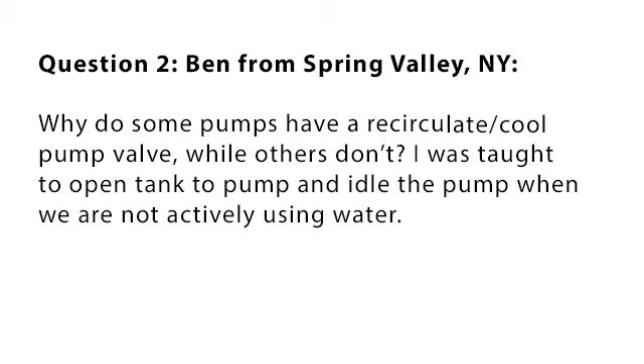All right, question 2. Ben from Spring Valley, New York. He says, why do some pumps have a recirculate/cool pump valve while others don't? He said, I was taught to open the tank to pump valve and idle the pump when we are not actively using water. I guess I'll take this one. Greg?

During the pump operation training, which we do, anytime we engage the pump, we want to be moving water. The reason for that is water that's deadheaded that comes from our tank and doesn't go back to tank or out to any discharges will heat up over time, and that will cause the water to get hot enough that it could cause damage to anybody that gets that water on their skin. So we worry about, number one, protecting the firefighter. So we never want to deadhead water. We want to keep that water moving.

The second reason, if it got hot enough, it's hard on mechanical seals and other parts that are in the pump also. So you always want to open up, recirculate water, but most of the manufacturers have gone away from what we used to have as a pump cooler line or a recirculation line that was typically 3/8 or a 1/2 inch, and they've incorporated that now into the tank fill valve.

So you want to crack the tank fill valve, and that's the important part, is just cracking it. A lot of times that's a 2-inch valve, and a 2-inch opening flowing at 60 psi is going to want to flow about 1,250 gallons per minute. So if you're operating from tank, at that point you would be trying to cavitate your pump and returning too much water to the tank.

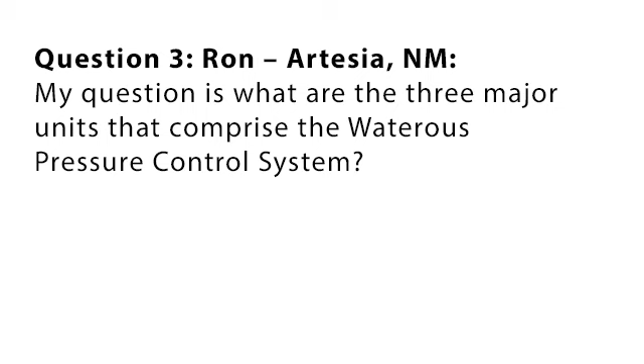All right. We'll go on to question number 3. Ron from Artesia, New Mexico asks, my question is, what are the 3 major units that comprise the Waterous pressure control system? I can take that one. All right, Jay? Basically, there are 2 systems. You have a discharge relief valve system, and you have an intake relief valve system.

The discharge relief valve system will control discharge pressure, so you don't have an overpressurization of a discharge line. If you're running 3 hand lines, you shut 2 of them down without a relief valve system in place, one line could be overpressurized, and it's firefighter safety.

You have 2 parts to that system. You have a relief valve, which is down on the pump itself, between the discharge of the pump and the intake of the pump. And then you have a pilot valve, or control, on your pump panel. The pump panel controller, the pilot valve, will sense pressure changes and control the discharge relief valve to bypass water from the discharge side of the pump back into the intake.

The intake relief valve system, again, has 2 components. Typically, you have a dump valve down on the intake, and you have a pilot valve on the panel or in a compartment on the opposite side of the truck, basically doing the same thing, controlling the intake pressure so that if you have a spike on the intake side of the pump, the water will dump to atmosphere to maintain a constant pressure on the intake side of the pump.

Main reason you have intake relief valves is you need a pressure differential between intake pressure and discharge pressure for the discharge relief valve system to function. There's got to be a differential so the discharge pressure can bypass back into the intake side of the pump. The intake relief valve also protects against water hammers. If there's a water hammer created on the intake side of the pump, it'll dump that water to atmosphere.

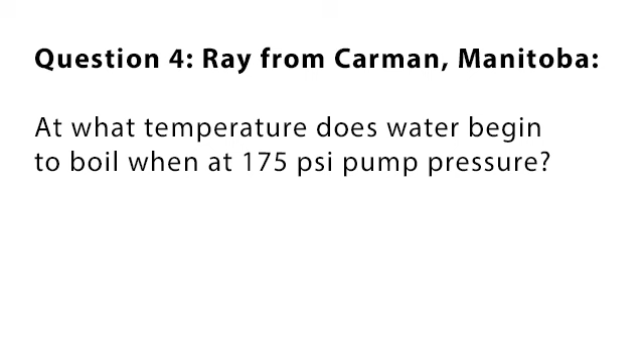Okay, our question number 4 comes from Ray from Carman, Manitoba. At what temperature does water begin to boil when at 175 psi pump pressure? Well, what we concern ourselves with is water boils actually at a lower temperature when it's under vacuum. So we run into cavitation problems, of course, in the eye of the impeller, due to the fact we tend to try to run away from the water, if we're trying to pump more water away from the pump than we can supply to the pump.

So that leads to cavitation, which in a vacuum is actually going to boil or turn to vapor at a lower temperature than our regular boiling point at regular atmospheric pressure, which is 212 degrees. Under pressure, that temperature raises quite substantially. It actually takes about 375 degrees Fahrenheit to boil water at 175 psi.

Now we end up having recirculation cavitation issues sometimes, which is on the discharge side of the pump, and that's also under pressure. But what it's doing there is creating a negative pressure right at the exit of the impeller and the stripping edge. So again, it boils the water and causes cavitation. Great, thanks, Greg.

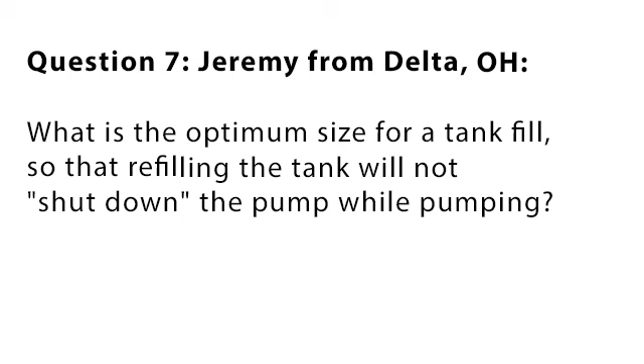Jeremy from Delta, Ohio. What is the optimum size for a tank fill so that refilling the tank will not shut down the pump while pumping? I guess since I answered the previous one about pump cooling, this one kind of ties in with that. As I mentioned before, most of the time the tank fill is a 2-inch line. Again, even when you're filling the tank from draft, you want to be careful that you don't open that too far.

And I think what he's talking about, shutting down the pump, built into the governors, it will realize when you get into a cavitation situation. So it might go down to idle and then it flashes low water at that point. So no different than your discharges. If you're flowing more water than you can get to it, you're going to get a cavitation situation. So it's really tough to answer because not knowing what your source is.

If you're from a hydrant, you shouldn't see that, and you got to be careful because a lot of the tanks, the plastic tanks with the baffles, they have a maximum fill pressure also. So not only do you have to worry about putting too much water in there at one time, which will cause cavitation and shut down the pump, we also have to worry about the pressure that's being exerted into the tank when you're filling it. So you have to worry about where your source is coming from and how far you open that valve.

All right, thank you, Greg. We're off to question number 8.

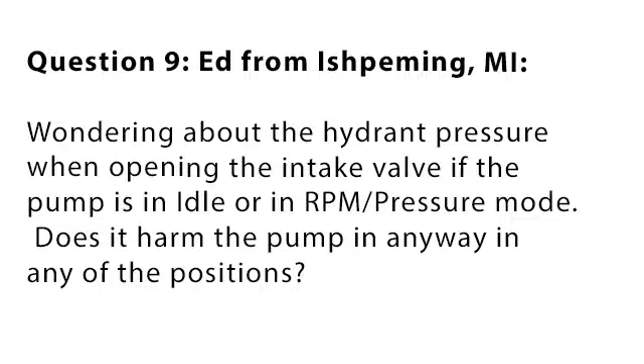Wondering about the hydrant pressure when opening the intake valve, if the pump is in idle or in RPM or pressure mode. Does it harm the pump in any way in any of the positions? Well, I think they're talking about a governor there, whether you're in RPM mode or in pressure mode. Yes, okay, that makes sense. I was trying to think of how our pump or system would matter there. But yeah, you typically are changing over at idle. And as far as the RPM and pressure mode, Greg probably would be better.

Yeah, if you're in RPM mode, as you open up the hydrant, let's say you're switching from tank to pump over to hydrant, it's gonna maintain that same RPM speed, and what's gonna happen is you're gonna get a higher pressure. You have to take the pressure that you're operating at from tank and add your incoming pressure, which would be the hydrant pressure. If you have it in pressure mode, that's where your safety is gonna come in, because it's gonna recognize that the pressure is increasing, and it's going to reduce the RPM or the engine speed to maintain that pressure that you have it set at in the pressure mode.

So as far as harming the pump, I don't, in either one of those, I think we're worried more about the pressure that's going out to the hand lines. So if you're in RPM mode, you need to take that into consideration if you're bringing in hydrant pressure, because again, it's going to add that hydrant pressure to your current discharge pressure. So typically you want to be in that pressure mode so that it has the reaction, slows the engine down at that point. The pump really isn't going to see, unless you're on a really hot hydrant, any issues with pressure.

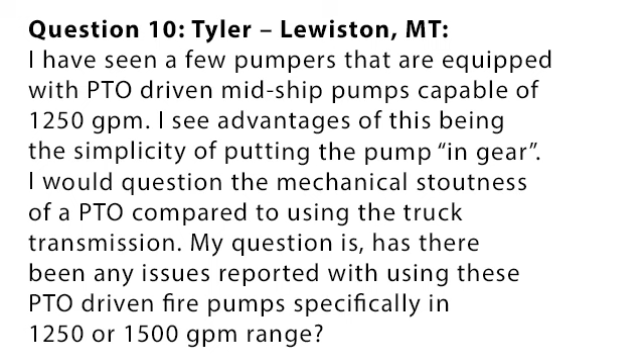The next question we have here is from Tyler, Lewiston, Montana, and this is a long one, so hopefully I can read the full thing. I've seen a few pumpers that are equipped with PTO-driven midship pumps capable of 1250 GPM. I see advantages of this being the simplicity of putting the pump in gear. I would question the mechanical stoutness of a PTO compared to using the truck transmission. My question is, has there been any issues reported with using these PTO-driven fire pumps specifically in the 1250 or 1500 GPM range?

This being more of an application question, I'll kind of take that as I had some time in the applications department. It's kind of a two-part question there. It does help that we don't have a shifting collar, so it does help in a shifting situation. A lot of our shift issues were taken care of with the help of the Allison MY09 standards, which if the OEM wired that in, it actually recognizes a butt tooth condition where you don't have a completed pump shift, and will actually jog the drive line to help it engage. It does help with putting the pump in gear as you are just engaging a PTO, which is a hydraulic actuation of the power takeoff.

Early on, the power takeoffs that were available both from Muncie and from Chelsea, we had problems with overloading or over-torquing those. As Steve had mentioned before, we've got plenty of horsepower in the engines that we have nowadays, and if you supply a pump with horsepower and the water, we can pump it a lot higher than the actual rating. So we run into issues sometimes where we can over-torque the power takeoff, but some of the OEMs have been able to tie in a speed limiter or a cutout or a limiting device, and they actually wire it in so that we don't overspeed the PTO.

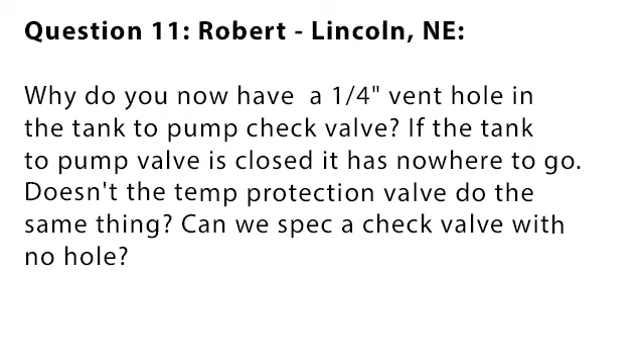Perfect. Thanks, Greg. All right, so we're going to move on to question 11. Robert from Lincoln, Nebraska. He asks, why do you now have a 1/4-inch vent hole in the tank to pump check valve? If the tank to pump valve is closed, it has nowhere to go. Doesn't the temp protection valve do the same thing? Can we spec a check valve with no hole?

That vent, basically, I think it's about an 1/8 inch hole that's drilled into it typically, but that hole is there if you're operating off your tank and you're flowing hand lines and you shut the hand lines down. Water has been coming in from the tank through the tank to pump valve, pushing the check valve open, dropping into the pump. The check valve is there so that if you charge from a hydrant and you don't shut your tank to pump valve, the check valve will close to seal off so you don't overpressurize or push a lot of water up into your tank, possibly damaging your tank.

What the hole is for is if you're operating off the tank, water's coming into your pump, you're discharging it, and you shut down your discharges, the check valve will close because there's no more water coming in from your tank. And now you just created a sealed vessel, right? And there's no place for the pressure inside the pump to expand to. So as you start to overheat the pump, you're right, an overheat protection manager would probably go off and blow that out of there. But if you don't have one, that's what the hole in the check valve is for. It allows the pressure inside the pump to feed back up into your tank.

And you also are correct, if you shut your tank to pump valve, obviously that hole in the check valve won't help you. But as far as the check valve and having a hole in it, all of our check valves do come with that hole. It used to be mandatory by NFPA. They did change it or put it into the annex in the back, just stating what that hole in the check valve is for. But it's a safety issue, basically.

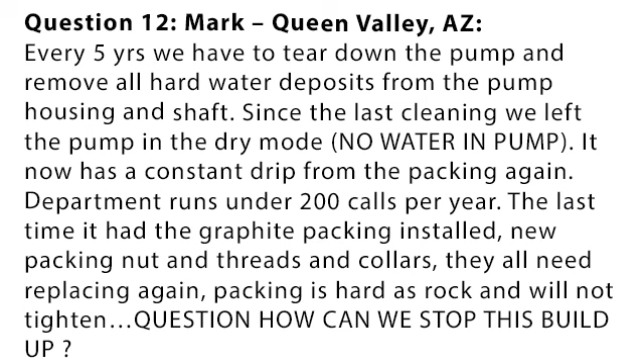Well, I can answer, I guess, part of it as far as why the packing would possibly start leaking or leak more. When you are leaving a pump dry, especially if you're leaving it for extended periods, the packing will dry out. Right? You need that moisture in there to keep the packing lubricated and basically swollen. I know Arizona, that area of the country, New Mexico, Texas, those areas have very hard water. We used to have to run special seals and stuff in Arizona because of how detrimental the water was out there. So as far as the packing, that may be part of it.

You're kind of a plus and a minus. If you leave it completely full of water all the time, you have the calcium in the water, and it builds up on the inside of the pump, on the shaft, and it sounds like that's what you've been cleaning up. Not running them, not having water in the pump can dry out the packing and can cause problems there. As far as how to stop the buildup, I'm not sure if there's really anything besides using the pump. The more you can use the pump and keep those lime deposits, calcium deposits, or whatever it is in there from building up is to continually use the pump.

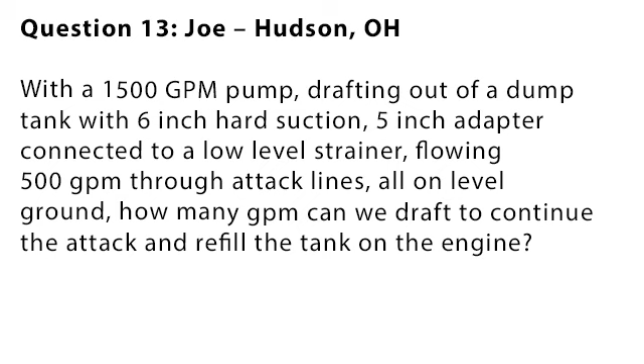I'll take a stab at this one, a little more applications also. So there's a couple of things that come into play when we're drafting. Versus a 1,500 gallon per minute rated pump, we rate that same pump a lot of times up to 2,000 or 2,250 gallons per minute. Problem is, at those higher ratings, you need more than one hose. So in this case, we have a 6-inch hard suction. It depends on your altitude, number one, and also the lift. That 1,500 gallon per minute pump is capable of doing a 10-foot lift up to an altitude of 2,000 foot.

So if you're at sea level, and you're only drafting from a drop tank on level ground, you're only doing a 3.5, 4 foot lift possibly. You should be able to pump in excess of 1,700, probably close to 1,750 gallons per minute if you did not have a butterfly valve. If you have a butterfly valve, that's going to be an added friction loss in addition to the low level strainer. But you're capable of getting up to that range. You shouldn't have any problem doing 1,500 through that strainer, especially without a butterfly valve. Anything to add?

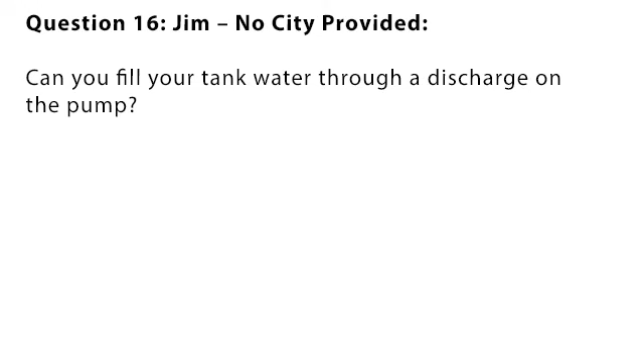Jim, no city or state provided. Is that you, Jim Fazekas? Can you fill your tank water through a discharge on the pump?

Well, Greg talked about that already. That's what we would call the tank fill valve, which is installed by the truck builder. It's a valve that comes right from the discharge manifold of the pump to the control panel, so you can open or close it, and then back into the tank to fill it. Not sure exactly what that question means.

A lot of apparatus being built nowadays have what they call a direct tank fill, which is an inlet on the pump panel or somewhere on the vehicle that leads directly into the tank, which would have to be connected to a pressurized water source in order to fill the tank. I've never heard of anybody doing it, but I guess you could connect a hose from the discharge outlet on the pump to that direct tank fill pipe and fill it that way. But every fire truck that I've ever seen has got a tank fill valve for that purpose.

Well, I tried to trick you guys here because there's a second part. So secondly, when working with a fire and the first engine runs out of water, can you hook the second engine supply line into a discharge of the first engine, then pump the second engine through the first engine to supply enough water to fill the first engine's tank and keep the hand line working? I've done this on vehicle fires on the interstate. I've had senior engine operators tell me that it can't be done as we are physically doing it.